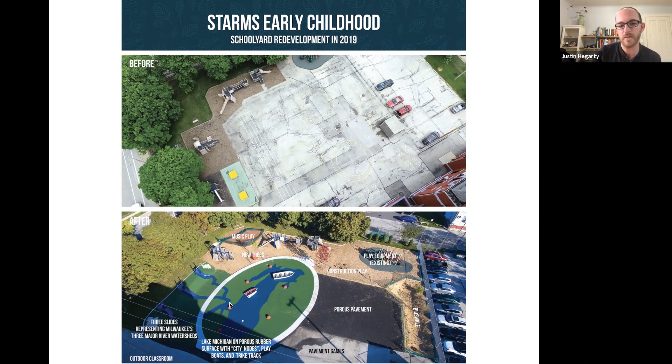This redevelopment also included some music elements, new trees, and an outdoor classroom, which is shown off screen as well.

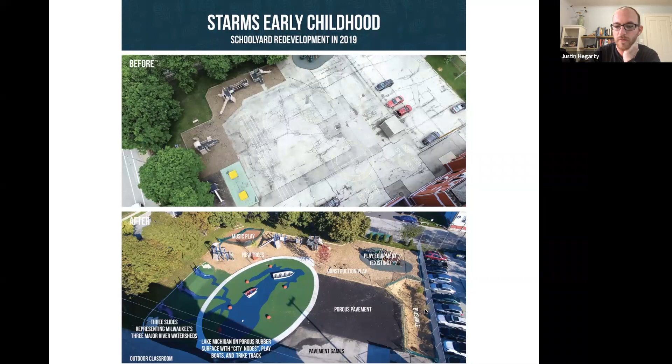That's a lot, and we're also working with Longfellow and Hawley Environmental on their underground cistern, which is beneath their kickball field at Hawley, to install sensors that measure how much water goes into each of these different types of green infrastructure. That could be connected to math and science activities at each school.

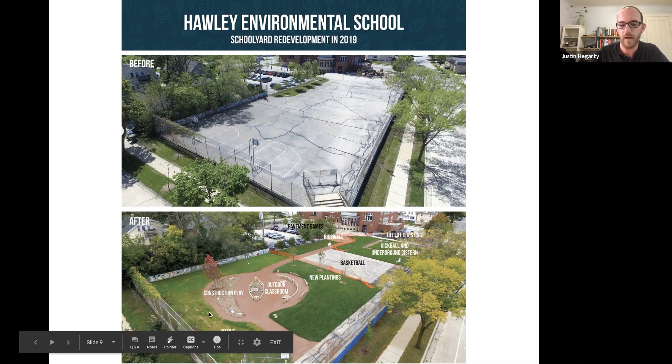In the case of Hawley, they had significant interest in native landscaping, which has a strong sensory component, along with more outdoor classroom spaces and trees.

Burdick is the last one I'm going to talk through. Again, there was a lot of asphalt beforehand, almost a city block worth. In this case we were able to replace about 60% of the asphalt with new green space that soaks in stormwater through a bioswale and some other features.

There is a hill that's a little difficult to see in this image, but it adds some topography to the space and was also an opportunity to plant native landscaping. Behind this tree and hoop house is an outdoor classroom and more trees.

I do want to point out that we don't want to remove all of the asphalt, because we want to make sure there's opportunity for pavement games and other activities. Basketball is further back there.

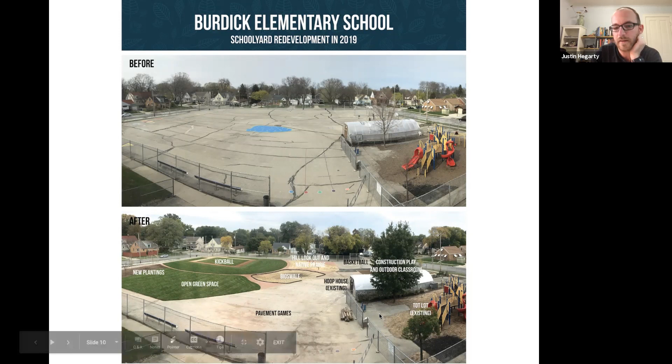Just to talk about how we select schools real quickly before I ask Zablocki to share their perspective: each year REFLO organizes a committee of the Green Schools Consortium of Milwaukee to help select which schools we work with. Each year we have about 10 schools. The schools fill out a 2-page application if they're interested in going through this effort.

And then we invite 10 schools to present to a committee of about 50 people representing different organizations and perspectives, to ask them about each school's need and enthusiasm. Each school has about 5 minutes to present, and then the consortium selects which schools to work with that are vetted through this process. And each year we work with 5.

So with that being said, I would ask Mr. Coleman and Luis if you would be willing to mention what was the original need and enthusiasm that you shared with the Green Schools Consortium, so we can share with everyone and remind them where Zablocki is coming from as we go through this planning process.

Yes, so we did talk about our 3 strategic priorities as a community school leadership team, and our need and our enthusiasm came from there. The safe and welcoming environment is one of our strategic priorities.

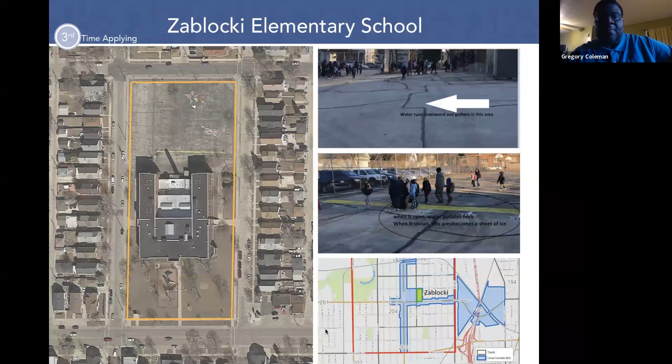And then you can look at the map too on the bottom right, and you can see that there are very limited green spaces in our area. So this is a need for the community, this is a need for Zablocki School, and we are so happy and so excited that we are embarking on this journey.

Awesome, thank you. So that's a good transition. The journey part of it - this is a further expansion of that original graphic that communicated the major process. If we're trying to focus on redeveloping that space and that construction, working with MPS facilities, they really want to target any construction to be over summer, so it has little or reduced impact to the academic year.

So looking at that, we would be looking, especially if it takes about a year to do the fundraising, a year for the conceptual planning, that would put us in construction over the summer of 2022. So that's a good 2+ years before construction takes place.

There's lots of opportunity here in the conceptual planning phase, all of 2020, to provide feedback. We're looking over the course of the next couple of weeks to try to get as much feedback as we possibly can so we can make some edits to the draft plan over summer. And then we can have another draft available at the beginning of the school year, with the intent of finalizing the conceptual plan by the end of 2020.

And then the intent with that is that we have a full understanding of what the plan is at Zablocki that includes all the things we're all very interested in, including green infrastructure, outdoor classroom space, recreational components, community engagement, safety, all of the things - and include that in the conceptual plan so that we can use it to help fundraise for the redevelopment that would happen the following year.

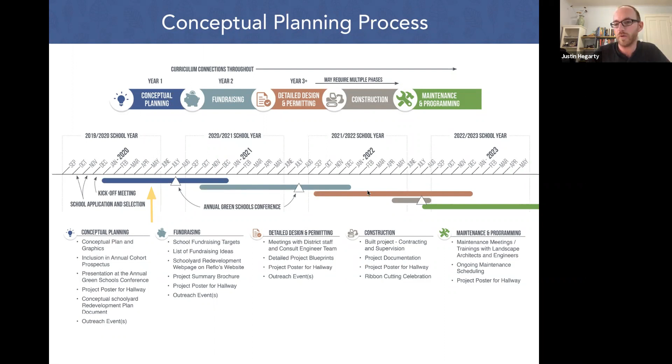To date, this page is all about what we've accomplished so far with the conceptual planning phase of development. That started off with taking some drone photos of the school grounds.

We also worked with MPS facilities to obtain historical records. MPS has an archives room with all sorts of utility information and historical maps of every school in the district, which is really great. We circulated a schoolyard use survey with the intent of getting feedback from teaching staff, maintenance staff, parents, and students to try to understand what works on the school grounds, what doesn't work, and also what are some of the existing activities happening at the school so we can support those and expand off of some existing strengths.

And then we took a lot of that information and sat down through our monthly green team meetings that took place all the way up until COVID hit. But we did have a chance to do a charrette, and that was really great with the school green team, as well as students that participated in that activity, which was awesome.

Everyone sketched different ideas. We talked through the results of the schoolyard use survey, and then we took all those ideas, sketched them on paper, and each of the small groups presented that to the larger group. And then CDS, the graduate program at UWM, working with Reflo, took all those ideas and put them into one draft concept.

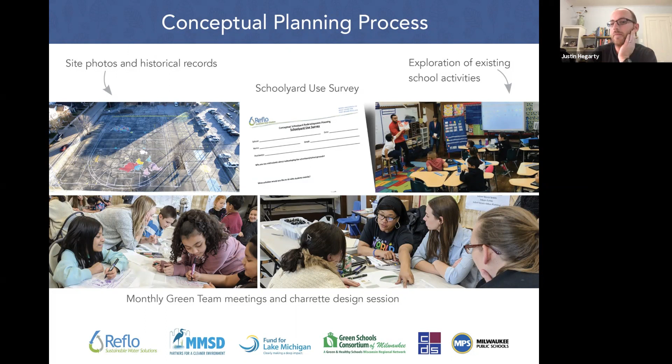In that one draft, last month, we sat down digitally with a small group at the green team at Zablocki. We got some feedback on that draft, and what we're about to review is the second draft. This is a good opportunity for everyone else to see what's going on and what the ideas are. But again, it's draft and conceptual, so now is the time to provide more feedback on what we're all talking about. With that being said, this is a good pausing point for questions. Are there any questions in the chat before we take a look at the draft plans?

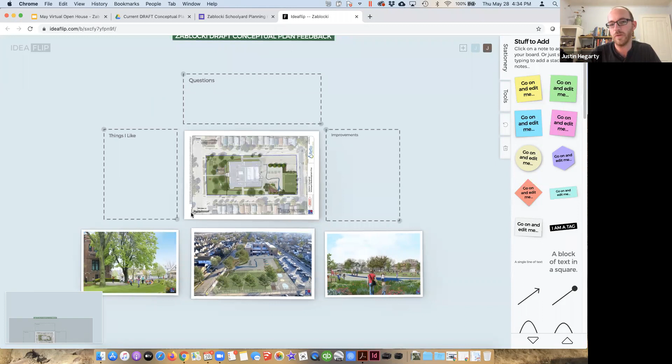In this document, what we've done is—again, the more preferred format for this would all be in person. We'd have multiple boards, answer questions, and break up into small groups. With that being said, we have a digital replacement for the time being. We're hoping we can meet in person in the fall, but we do feel it's important to get feedback early on right now.

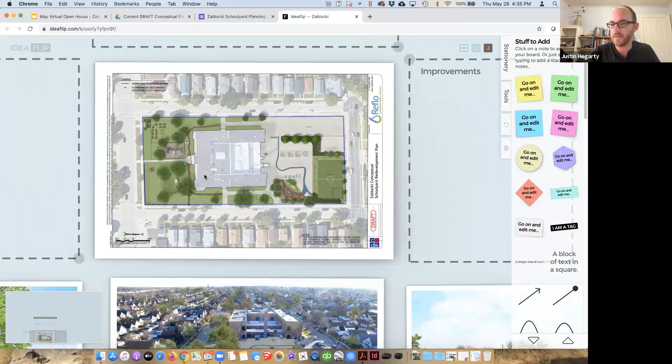So imagine this software we're using is a means for people to provide Post-it notes and comments on what we're all looking at. I'm going to walk us first through the draft conceptual plan, and then walk us through how to use this software so everyone can start to provide some comments.

Here's Zablocki. North is to the right over here, and then this is the back.

So right now this is all, for the most part, asphalt. Some of the major features we're talking about, I'm going to zoom in here. There's a blue dot right down here, and all of that stormwater from the parking lot and the existing asphalt all drains to one point down here.

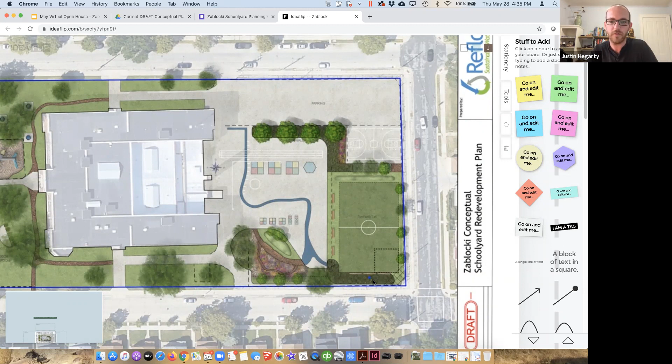Kind of what I just mentioned about driving from the stormwater management perspective, what we're showing here in this dark green color is a bioswale that will help soak in the stormwater. And then we're talking about removing asphalt and putting in a synthetic turf soccer field. We're talking about synthetic, or AstroTurf, which is a brand, because of how popular we know the soccer field will be, both by the school and the surrounding community.

That synthetic turf field does cost more, but it will be more resilient than a natural turf field would be. And that synthetic turf field, just like the Longfellow example I showed, offers the opportunity to store additional stormwater underneath that soccer field through some large scale cisterns.

In this case, it's shown by a dotted box here. So those are those two features, along with what's being shown here, kind of a hill or a little berm. That berm would only be a couple of feet high, so the intent is not to impede visuals or sight lines to the site - students couldn't hide behind the hill - but it does provide a little bit of a backstop to the soccer, as well as helps to manage the construction excavation of the soils that would accommodate here. We can manage that on site, which helps to reduce construction costs.

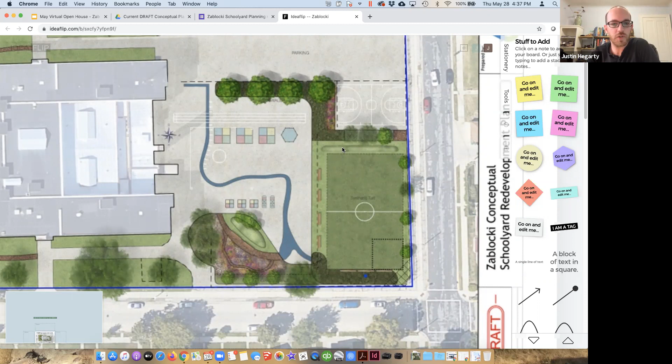We want to keep the existing basketball court, the full basketball court, because that's really popular and looks really great and fits really nicely where it is. What we will want to show here is that people - students and community members - can walk adjacent to that basketball court. I'm going to show in a moment how to make a comment about that.

But we are showing a bioswale and tree plantings here that takes stormwater off of the parking lot and helps to soak it in before it gets connected to this other bioswale as well.

This feature down here - there's an existing green spot with some trees that are already here on the existing schoolyard. What we wanted to do is remove more asphalt and add more of a sensory garden space. This would be planted with native plants. One student had brought up the idea of having lavender planted in there to help act as a calming space for students during recess and other activities. This is intended to support that.

Again, another hill feature or berm feature with trees. And then we are keeping a lot of the existing asphalt. So this whole area is all existing asphalt that would remain in place. What the plan is showing is that it would be seal coated, which would essentially erase all of the line work that's out there now and replace it with this new line work.

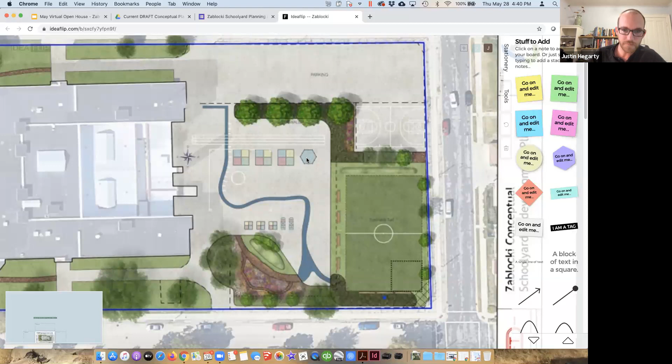And then I'm just going to slide over. There was significant interest in helping to redevelop the front of the school grounds as well. There's a lot of existing green space, really great mature trees. So we wanted to expand on that first by putting in an outdoor classroom space that had a stage.

So that could also double as a performing arts space.

And to support that outdoor classroom and maybe some of the conversations that would happen there, the thought would be to put in some berms and native landscaping behind that to help buffer some of the sound from the major road to the south, but ideally not impair too much of the sight line.

So we're not providing spaces for hiding, but more like sound reducing features or buffering features. And then also this dotted line that's shown would be decorative fencing that further secures this corner of the school grounds, so it feels safer and we don't feel like students are going to be running out this way towards the street.

This decorative fencing, not necessarily chain link, would help to further secure this big corner of the school grounds. Right now there is not a path, but the intent is to put in a crushed red granite pathway here that also allows for more accessibility to the front of the schoolyard or school building. We're talking crushed red granite because that would be wheelchair accessible.

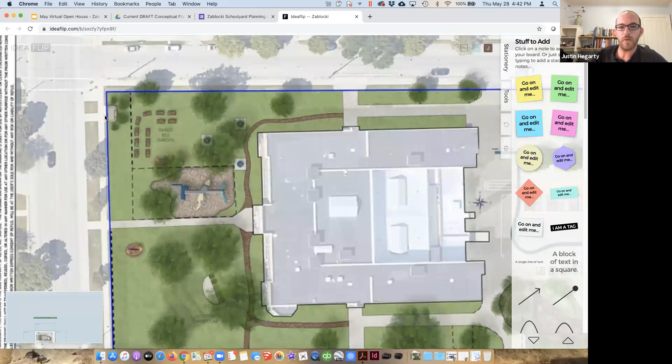And I think those are the major components. I'm just going to show some visual perspectives that CDS put together, which is really great. These renderings are intended to help further communicate what's going on with each of these different spaces.

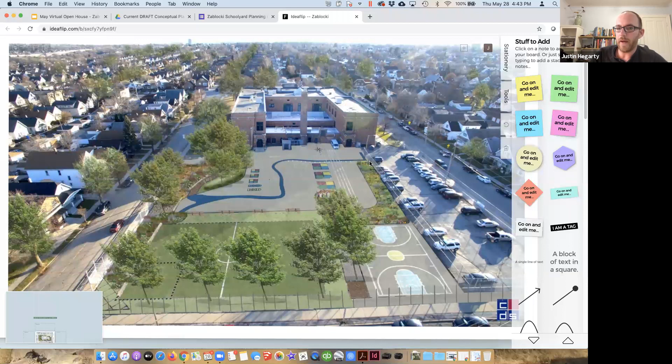And just slide over a little bit further. This is taking that drone photo with a rendering over the top of it. And so here that bioswale is kind of the same stuff that we're talking about, just shown in a little different way. So again, bioswale, there's some existing trees to further support those.

That existing basketball court, leave that. But add a new soccer field, some additional trees, and that more sensory, quiet space.

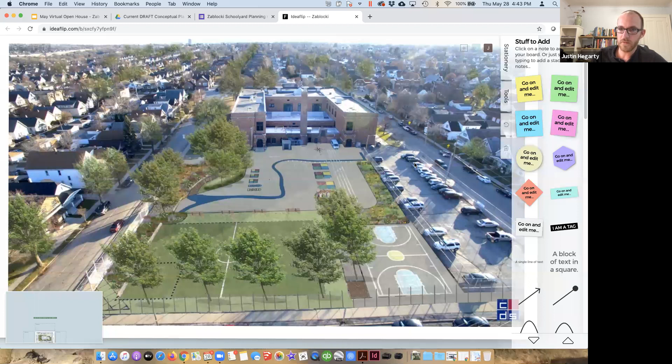And then one last rendering to show off. This is of the school grounds as well. And here's some benches. In the background here is Gaga Ball.

Here's the asphalt markings. Something I should be clear about is that blue line is not water. That's actually asphalt. That's painted line work on the asphalt.

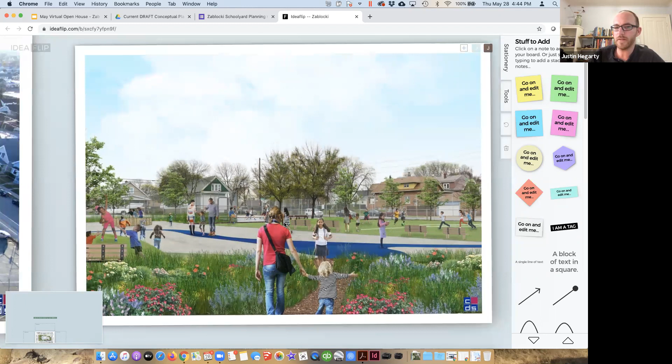Okay, so those are some renderings, and just kind of zooming out here. So before we open up for questions, I'm just going to explain a couple ways to provide feedback on this, and then we're going to open it up and ask for thoughts and comments.

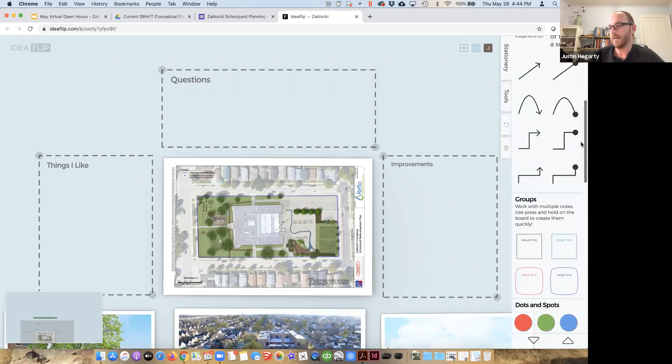So this software that we're using, Ideaflip, we've structured in a way that we're asking people to provide questions that they may have in this box. So one question, I'm just going to show you, when you open it, on the far right you may see these tabs. And if you click this stationery tab, you'll see a big long list of options for people to select. For our purposes, I'm just going to select any one of these Post-it notes, any color, it doesn't matter. So a good example, I'm just dragging and dropping here.

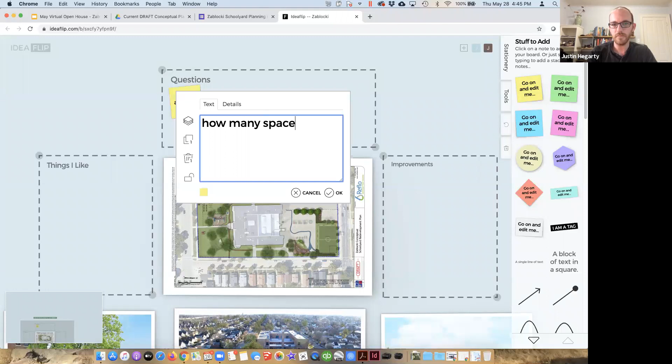And so if I have a question, a good question is, how many spaces are in the outdoor classroom, right? I'll also mention that when I click to the details, I can see who created this Post-it note. So if there are questions that are really specific, we can follow up with that individual as well. So I'm just gonna hit okay.

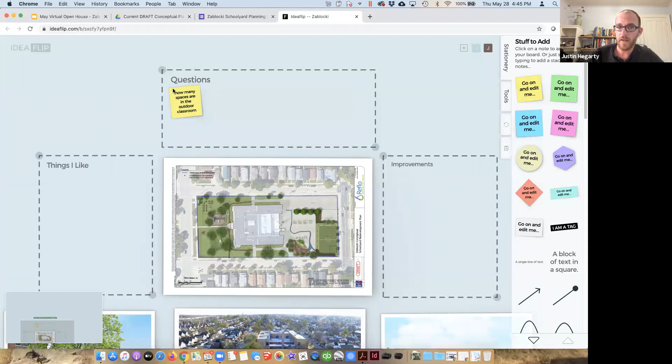So that's a question. If people like certain features, that's really important to understand as well. So if you really like the connection with local water resources, please say that. That's really helpful to understand, so maybe we can further expand on some of those components. So, connection to water resources. There we go. And we can get the spelling right later.

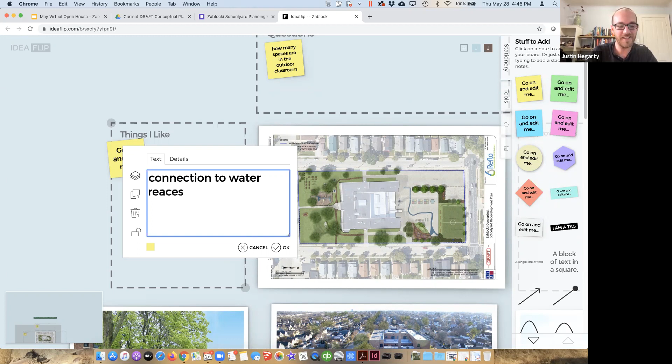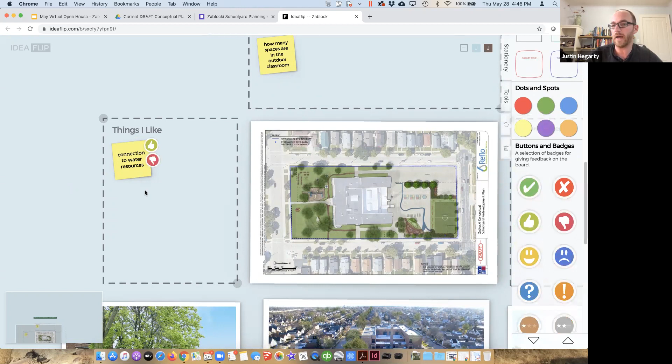Okay, so that's that. If people want to further support what's going on, feel free to explore some of these stationery items on the far right. If you scroll down, you can add thumbs up to certain features. If you don't agree with a certain feature, go for it, thumbs down. That's great if you want to respond that way. And then if anyone has ideas for how to improve it or certain features, please provide that as well.

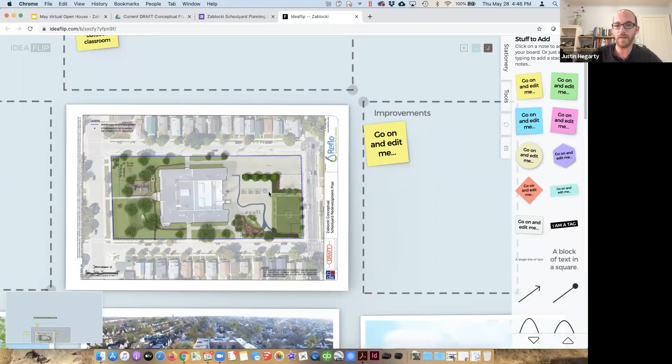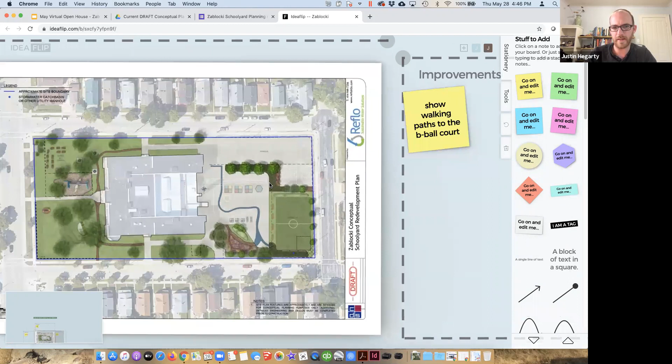One thing I can see right off the bat here, and again, this is draft, I think we should show walking paths, paths to the basketball court. So in my mind, that's not necessarily showing bioswale making this turn right here, but showing that as crushed red granite again, to show that people can walk from this way all the way to the basketball court. And then if you have comments or thoughts about these perspectives, please feel free to drop Post-it notes in there as well.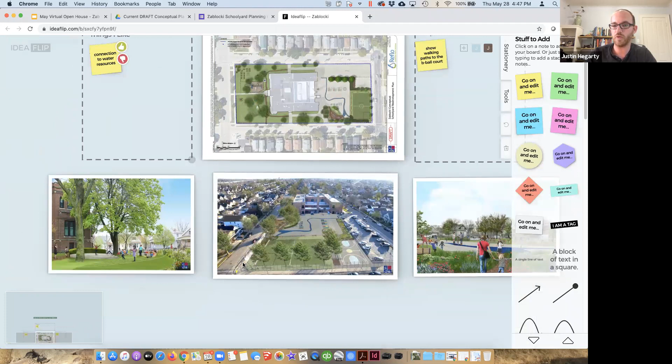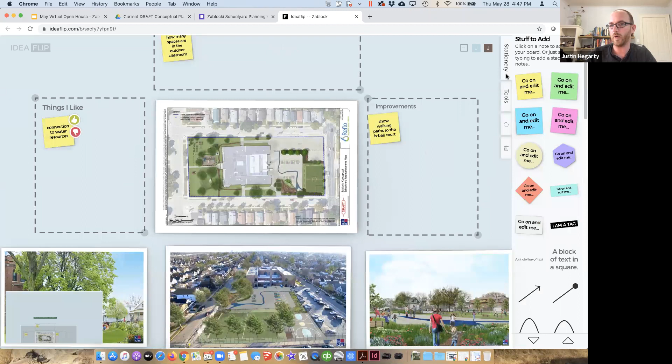So with that being said, we can open it up to questions. I'm going to share this link in the comments window, so anyone can log in and start filling out or responding this way. And I will just mention here that this is not the only way that people can provide feedback. So there's the link for it.

Does anyone have any questions that I can answer while everyone logs into IdeaFlip? I'd be happy to answer them. I'll also say that there's a Google form that people can respond through as well. So here we're asking for people's names and email addresses. This is optional, you don't have to do both of these options, IdeaFlip and the form. But this form allows you to download all the images we just reviewed.

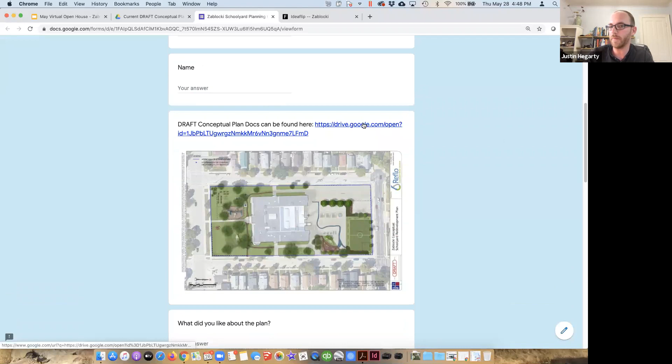Same question, what do you like? This also helps you to grade what things you like most, or if you're not interested in certain features, that's helpful to note as well. What do you think should change? And then here, this is really important feedback as well: who else should we invite to provide perspective on the plan?

If you know of particular stakeholders, please share that with us so Zablocki can reach out and Reflo can support that activity. The best feedback on this is specific, so if you know of a certain neighbor, please provide contact information, or if you want to reach out to them, please do so. What we're going to be doing, as I flip back to this, is share these links in this recorded webinar, but also reach out to people for the fall in-person meeting as well.

Okay, with that being said, are there any thoughts or questions I can respond to via the webinar? Otherwise, you can provide questions and thoughts in either IdeaFlip or the Google form as well. Justin, there's a couple questions in the chat that you might want to address. Okay.

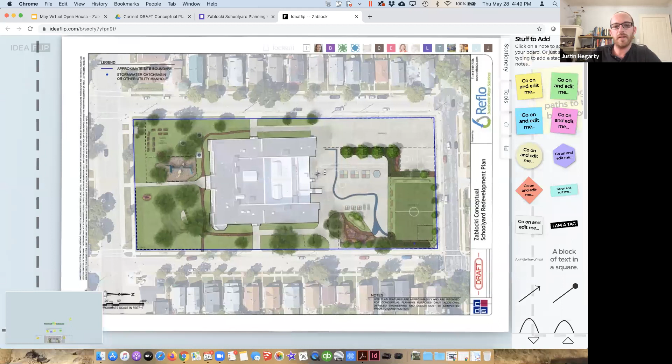Considerations for winter plowing, that's a good question. I'm going to jump back to this. So MPS policy is to plow only around the building and around school entrances, so unless there's something being done differently on the school grounds, that wouldn't typically be plowed. But that is something of interest. As a part of this redevelopment, we would want to make sure we're addressing the ponding issues that were indicated previously as well. But winter plowing is something that would be communicated with MPS facilities and the engineering staff at the school, to make sure that any features are not impacted by plowing activities if they do take place on the school grounds. Something we are exploring with the other schools is putting in bollards around some of the more sensitive infrastructure, so that if there is a plow in some future date, plows know where not to go as a part of the redevelopment.

Other questions? Hi, yeah, good afternoon. This is Dr. Griesbach and also Mr. Galvan, regional team for the Southwest region. So glad to be here and super excited that Zablocki School is one of our green schools. Thank you, Mr. Hagerty, we're very, very proud and honored. So Mr. Galvan, go ahead.

Hey, hello everybody, how are you all? I recognize most of you. So Justin, really quickly, in terms of when we talk about fundraising, and I know we're just at the beginning of the process, but is there a number that the goal is?

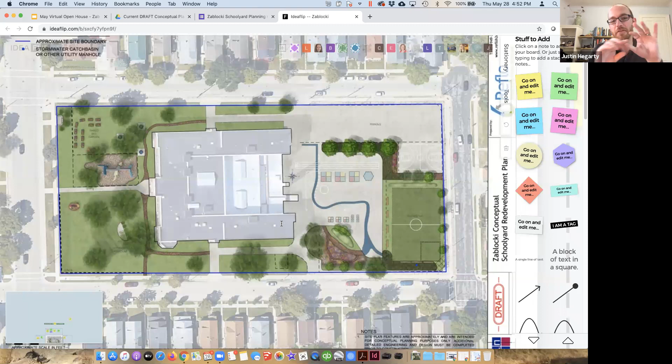So, Mr. Galvan, your point about success in the fundraising year is really important, because all of these things are maybe feasible, but if we can't raise the funds for it, then it won't happen. So that is why we do have a full year, or a year plus, dedicated to fundraising.

To that end, each school is different. Schools have different sizes, different components. With that being said, they've ranged between $300,000 to $600,000 for a redevelopment.

Over summer, as we condense some of the comments on this, I will work with the facilities team to put together a rough cost estimate of how much we think this particular redevelopment will cost. And when I do that with facilities, we use what we're seeing from construction this year and the previous cohorts as well, so the information we're putting into that is informed from actual construction costs.

With that being said, the other part of your question was, how much do we expect for the school to put into the fundraising effort? What we've talked about through the Green Schools Consortium is setting kind of a floor to that number of about $10,000 for each school. $10,000 seems to be a healthy floor for the fundraising for each school.

Some schools are able to raise 100,000 plus, and those schools are able to get the outdoor classroom and all of the other features, and they're very motivated to do that, and that's excellent. Some schools, not every school has access to the same resources, and we want to recognize that. We do still think that $10,000 is reasonable for all of those schools that may not have the same access to resources as well.

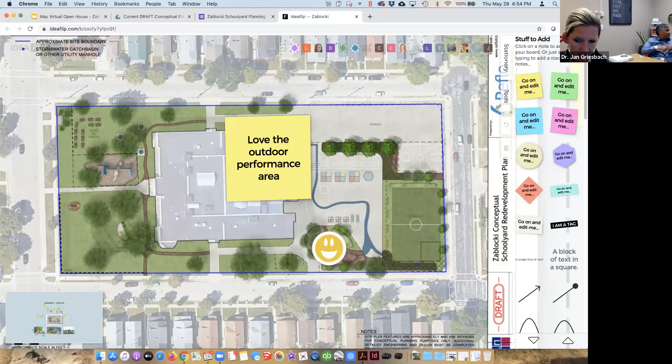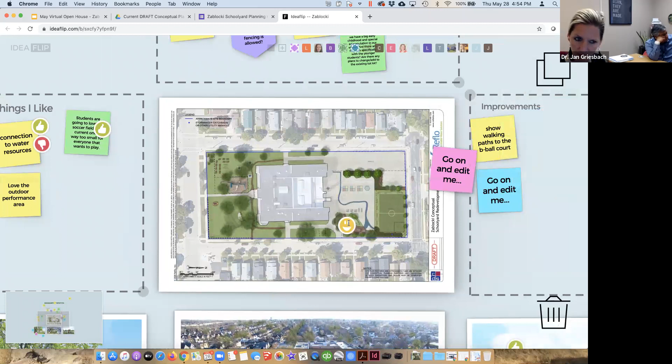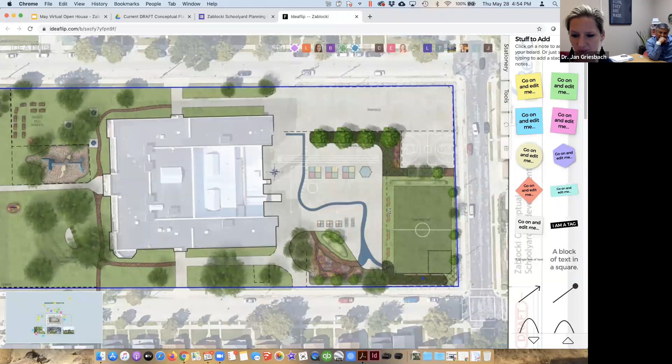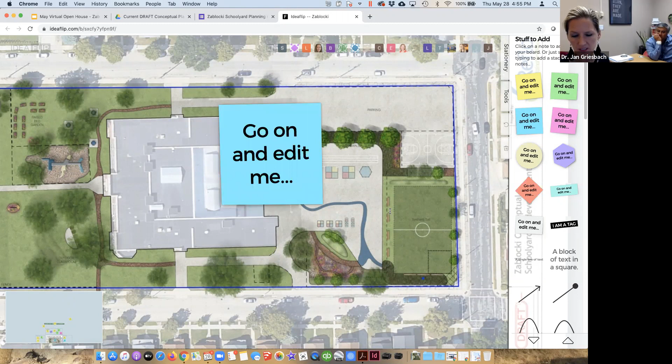Yeah, so that's a good point. The intent with that effort was the Green Schools Conference each year. This year was going to be the 5th annual, going to be on August 6th, and was actually going to be at Longfellow. The intent being that we could have all of the principals and green teams from all of these schools gather at a schoolyard that's been redeveloped and interact with their green team, provide feedback on that. Unfortunately, the Green Schools Conference, due to COVID, has been canceled for this year.

So that's difficult. What we have been talking about in the past was being able to facilitate a tour of schools that have gone through this. We've done this effort in a couple of other contexts where we have a short bus with 20 or so people, and we do a short tour to talk with the principals on their school grounds, because seeing the school grounds is like a whole other perspective as well. That's really important, but those are two means for doing that.

With COVID, that's a really good point. I think we may need to adjust strategies. Maybe we can facilitate some sort of online discussion. We can definitely provide the contact information for principals that have gone through this.

I know Mr. Galvan, Escuela Vieau and Bradley Tech were in the pilot year. That was different, the pilot was all focused on green infrastructure. We learned a lot with Escuela Vieau and Bradley Tech. Things have evolved so that it's more of a holistic schoolyard redevelopment. We're able to include the outdoor classroom and some of these other features.

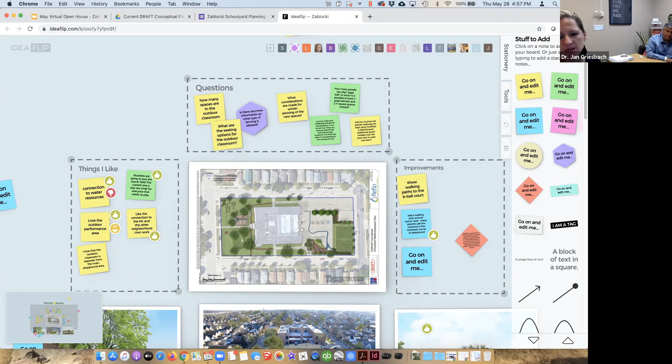Super, thank you Mr. Hagerty. We're very, very appreciative, you've done such great work all along, you and your team. This is such wonderful work. We're super excited about the work and the partnership.

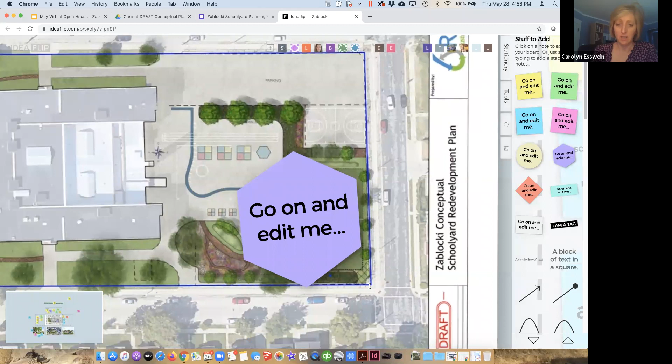Thank you. Justin, can you have a little more discussion about the path around the soccer field? We know there's an entrance there and people enter at the gate. So we were thinking they could enter and walk across the field, but should we shift it so you can actually walk around it? Just a little more feedback on that.

There's several comments in the chat and on the board about wanting a pathway around the soccer field. Gotcha, yeah, we'll follow up with that one.

And the reason I'm going to hedge on this is because we're coming up on 5 o'clock and we have the Spanish version of this session at 5 o'clock. So I don't want to keep any of our Spanish speakers waiting, but we will definitely address that over the coming month and talk more about what that means. But we do want to make sure this entrance is maintained if the school would like to do that, and it makes sense with facilities.

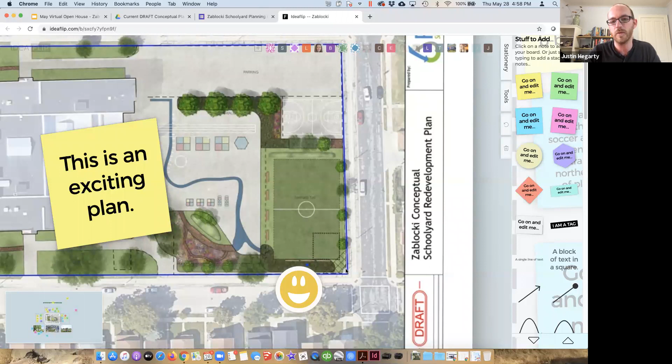Please do keep continuing to provide these comments. I'm going to transition here, we would like to get as much feedback as possible by June 12th, about two weeks from now. Please share this with anyone else you think is appropriate. Immediately after this meeting concludes, Lisa's going to send out an email that has all of these links, and please just forward that on to community members or others that are appropriate to see this.

I will follow up again with the principal and the other connections with the other schools. I think that's a really great idea. As we have more time to digest some of the feedback that's coming in right now, we'll follow up next month with more responses to some of this stuff.